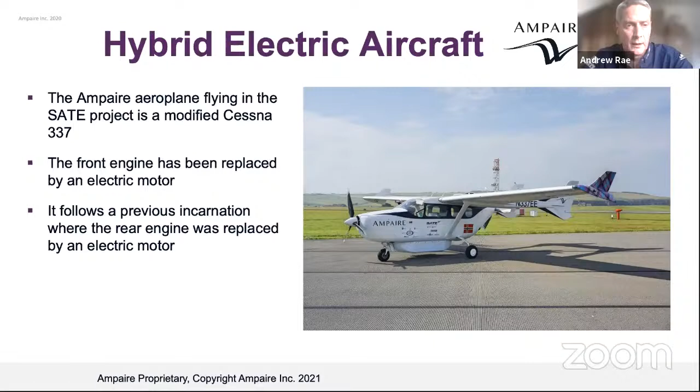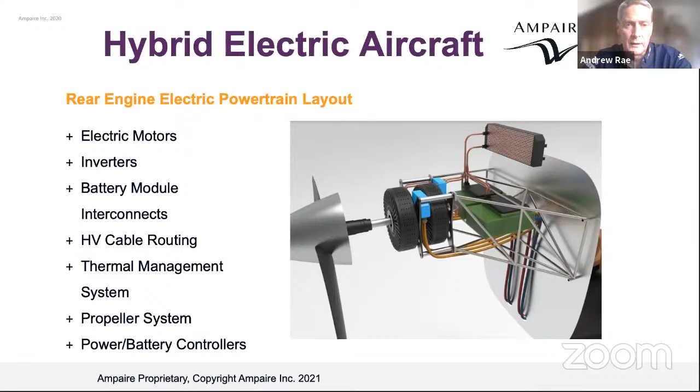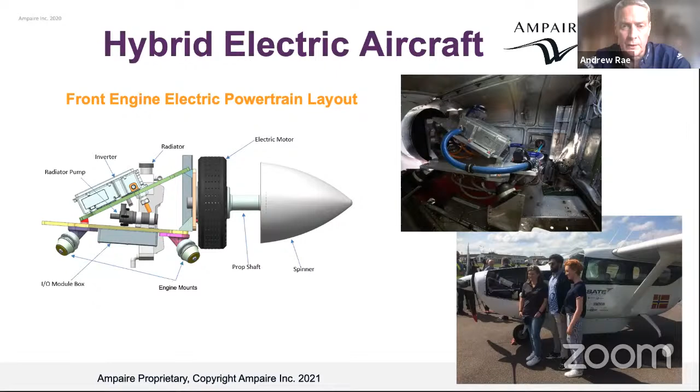The version that flew recently in Orkney had the front engine replaced with an electric motor. On the bottom right you can see some of my colleagues at Ampaire, and the picture above that is where the internal combustion engine used to be; now there's quite a large void showing where the silver box with the blue cable going into it is the inverter. The black donut at the front is the motor, and the rest is to do with cooling. Because this part of the aircraft is near the nose, and the motor weighs a lot less than the internal combustion engine, we've had to put ballast in to keep the weight and balance the same. The battery sits in a gondola underneath the fuselage. Next slide, please.

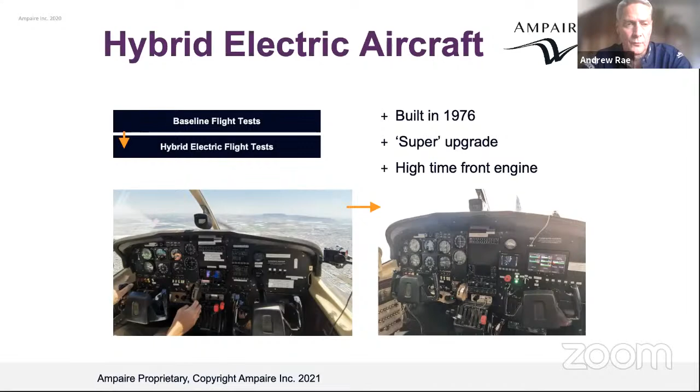The original aircraft was built in 1976, and we took the decision to replace the front engine. On the right-hand picture, just in front of the right-hand yoke, you can see what looks like an iPad with green lines on it - that's the new electric motor management system. It gives us things like the current state of the battery, the motor temperatures, and that sort of thing - the things the pilot needs to know about for the alternative power plant. Next slide, please.

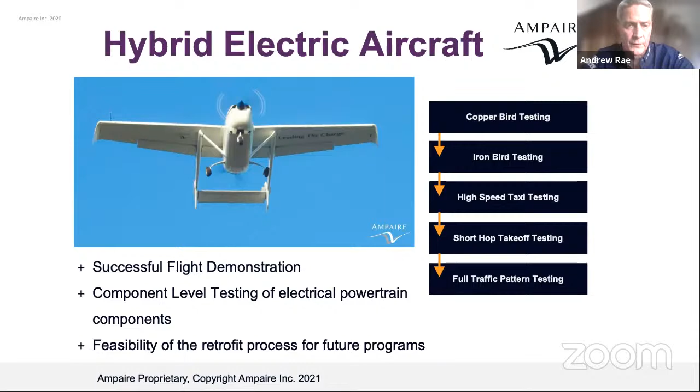So we went through a development process, and I'll describe each of the black boxes on the right-hand side in more detail in a minute. The original incarnation with the rear engine went through a successful flight demonstration, but that followed a series of component level testing and feasibility tests for the configuration we'd chosen. Before it flew, we did some taxi tests just to make sure the aircraft was functioning correctly.

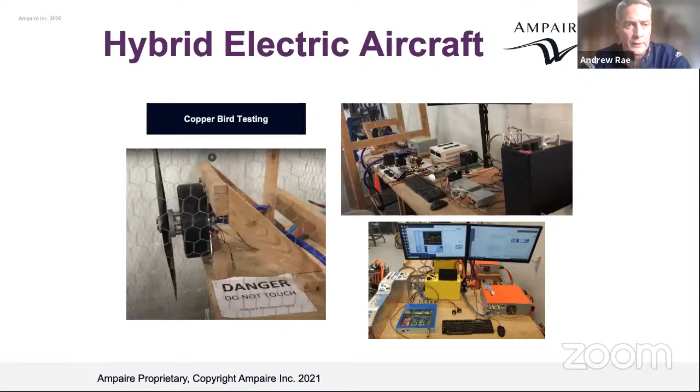So the first phase of that is what we call a copper bird. The copper being electrical wire, it's testing the electrical system off the aircraft. We have a caged motor and propeller there for safety on the left-hand side, and all of the electronics and control systems needed to control that motor were tested on a bench before it ever went anywhere near an aircraft. It's important also because there's quite a bit of software involved, so we can test the software fully without endangering any aircraft.

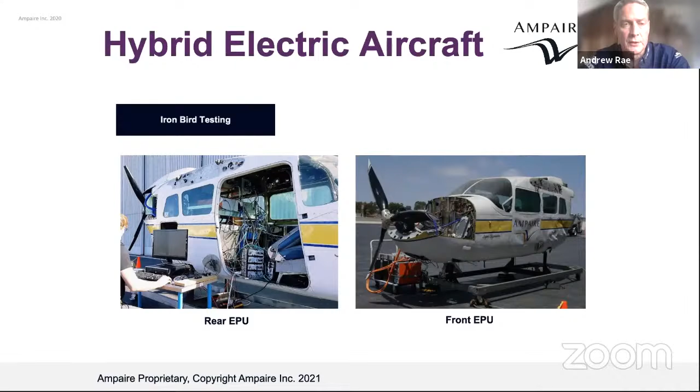Then we move from the copper bird to the iron bird, which was the same airframe, but an old expired airframe that we installed the system into to make sure everything integrated into the aircraft. We did that for both the replacement of the rear engine and the front engine. So it's checking the installation, checking that we can fit everything where we need to, that the wiring and cabling works, and that the software works in situ in a representative airframe.

As I said, we had to test all of the software, and that includes the motor control, which the pilot has the main input to, but also the battery management system. One of the problems with batteries is thermal effects, so we don't want thermal runaway - you've probably all seen what happens when lithium-ion batteries get too hot. But also, as part of the safety case for the aircraft, we can discharge the battery at a greater rate than normal, which gives us 5 minutes of full power on the front engine. So for example, if the rear engine failed, it gives us an opportunity to land the aircraft safely at a point of our choosing rather than just where the aircraft decides to fall.

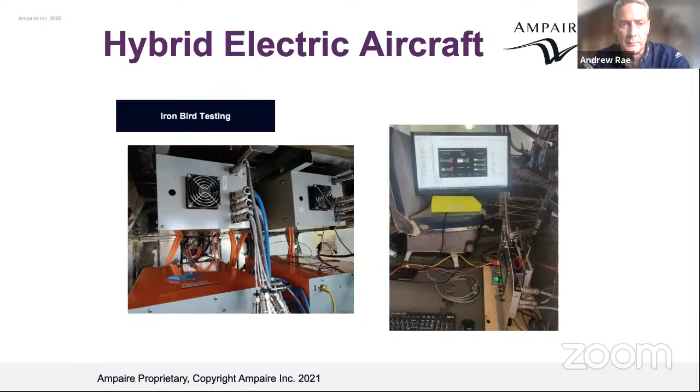A lot of the work is also what's called the human machine interface. So it's understanding what information the pilot needed to monitor the aircraft, as well as all of the scientific data logging that gives us an idea of the performance of the battery and the motor, not all of which is needed by the pilot. So it's refining which parameters the pilot needed to see, presenting those in a manner that was easily readable, so that we could then go to flight testing and the pilot had confidence that he was in control and had enough information to determine the state of the aircraft.

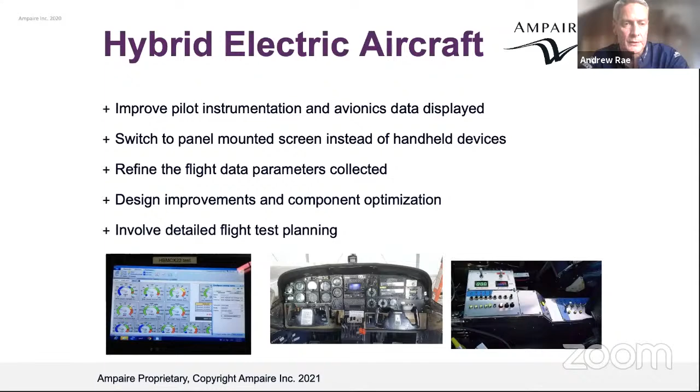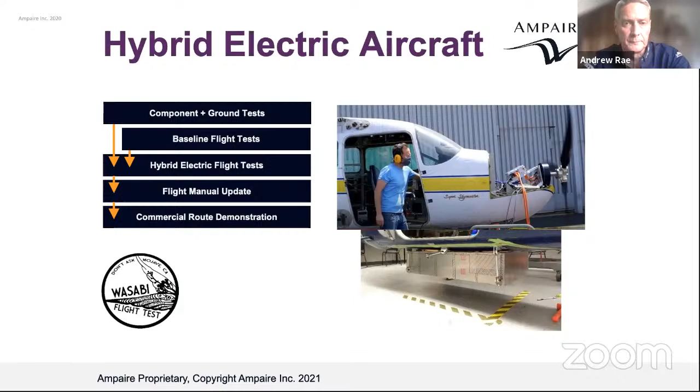So once we'd done all the Iron Bird work, we created the aircraft that did its first flights in California. It did 24 flights over a period of 28 days, accumulating just over 33 flight hours, and nothing went wrong with it - so we had 100% dispatch reliability. It has to be said that the electric motor is much simpler than an internal combustion engine, obviously, so the maintenance and reliability is much improved. At that point, we recorded the longest electric flight, which was 341 miles, lasting 2.5 hours. We broke that record recently, and I'll come to that later.

Having successfully flown in California, the aircraft was taken to Hawaii for flight testing on some airline routes there. We did over 20 flights over a period of 17 days and accumulated more than 20 hours, and again, nothing went wrong. This was the first trial of a hybrid electric aircraft on actual airline routes within Hawaii.

There's some interesting scenery in Hawaii, including part of a volcano. Flying over water in an electric aircraft is one of the safety cases we have to address, and obviously we had to do that when flying from Wick to Kirkwall as well.

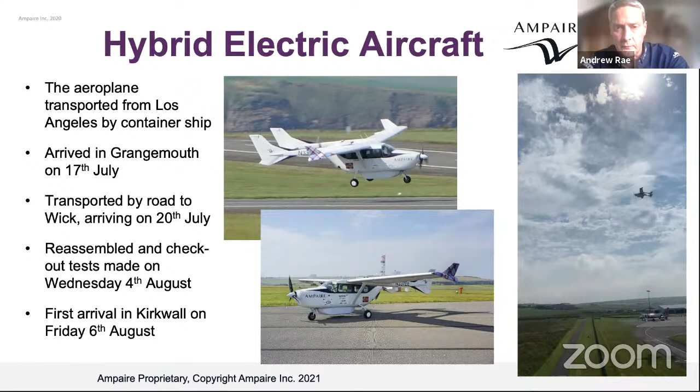Top left is the aircraft first arriving in Kirkwall, and there's a nice picture from the control tower at Kirkwall taken by one of the air traffic controllers of its first departure on that Friday.

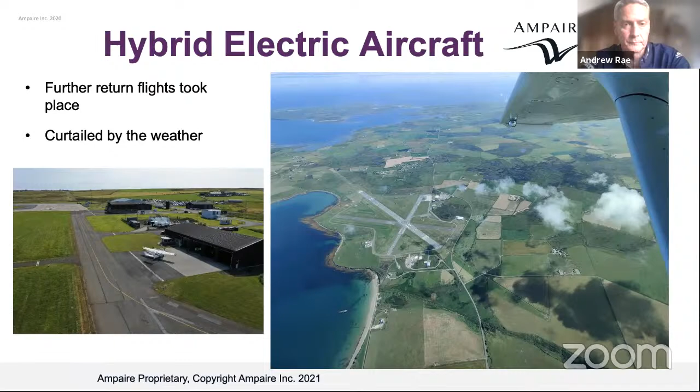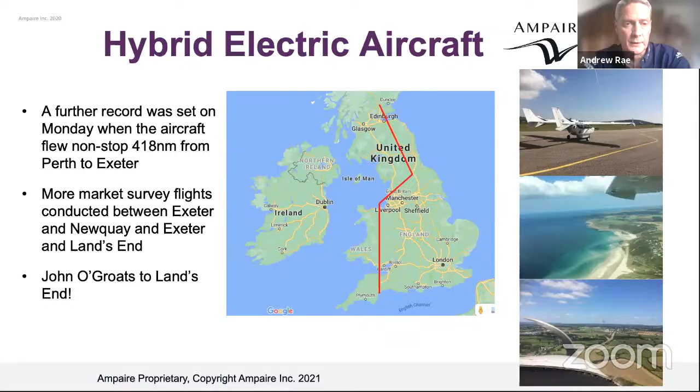Thank you, Andrew. Then also at Kirkwall Airport, a new project is underway to use an unmanned aircraft, or drones, for cargo delivery. This is led by German Moreno, who is head of flight operations at Windracers, an organization established to use drones for work for public benefit. German, the screen is yours.

Thank you very much, Noor, for the introduction, and thank you for the invitation to the event. My name is German Moreno, and I'm part of Windracers. We're an organization that wants to do freight transport using uncrewed aircraft systems. Today I'm going to be talking about the work that we're going to be doing in the Orkney Islands, starting the end of the month, September 2021.

So a little bit of background about Windracers and how everything started. The founders, in 2017, had this inspiration, and they looked at problems in places like South Sudan, where many people require food rations and humanitarian relief items. In South Sudan, it's estimated that 7.5 million people are in need of these items. Currently, deliveries are done either by road or by aircraft, but the civil war and floodings have decreased the amount of aid that can be transported via road, so many of these items need to be transported via aircraft. The founders of Windracers thought this could be done with unmanned aircraft systems.

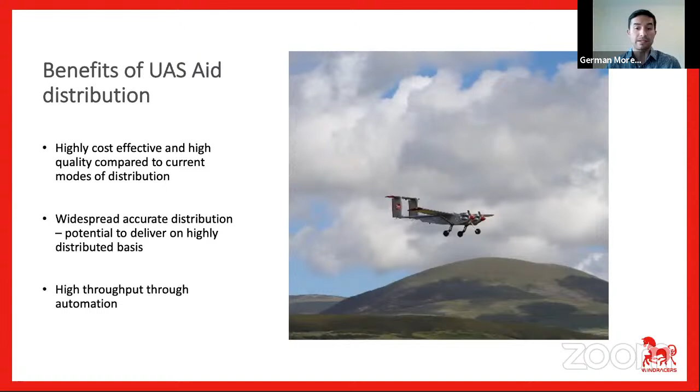So during the last decade, there has been a lot of talk about the benefits of using UAS over crewed aircraft systems due to the cost and things like that. But basically, we know that for this type of mission, the amount of automation that can be applied to these systems can be very beneficial and reduce the cost of these missions, for widespread distribution and the high throughput that can be gotten from automation.

So this is about the conceptual design. Basically, the initial requirements that the University of Southampton had for designing and developing this aircraft was 1,000 kilometers of range, carrying 100 kilograms payload, a lot of focus on the reliability of the aircraft and redundancy of the critical flight systems, that it's easy to maintain and has a small ground footprint. And most importantly, being able to operate in really rough areas and from short and unprepared runways, preparing this to operate in places like Africa.

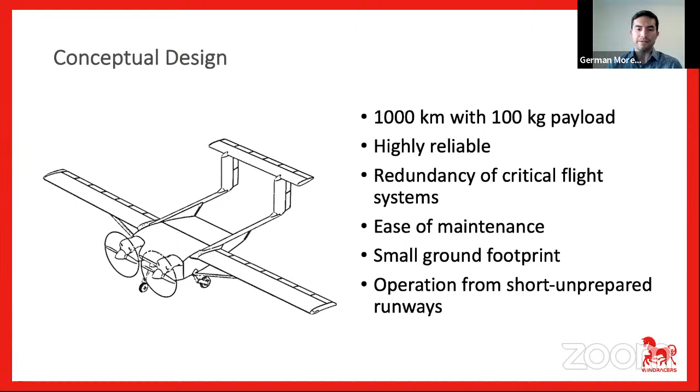So these are the specifications for Ultra TD2. It's TD2 because this is the second generation aircraft. The first generation aircraft, Ultra TD1, flew for the first time in summer 2019. And from then on, we have been doing a lot of improvements. This is a narrower body and improved performance aircraft.

So the aircraft you see there is Ultra TD2, has a wingspan of 9.7 meters. For reference, this is pretty much the size of a small manned aircraft like a Cessna 172 or a C-42. It has an empty weight of 285 kilos and a maximum takeoff weight of 400 kilograms, of which 100 kilograms can be payload. Current fuel capacity is 33 liters and it flies with about 9.5 liters per hour, so about 3 to 4 hours endurance is what we currently have.

And we're moving on to the next iteration, which will have between 6 and 7 hours endurance. The usable volume, which is probably sometimes more important than the payload mass, is 700 liters - to give you a reference, that's as big as the boot of a estate car. It cruises at about 75 knots, and its wind limitations are 40 knots total wind and 20 knot crosswind for takeoff and landing.

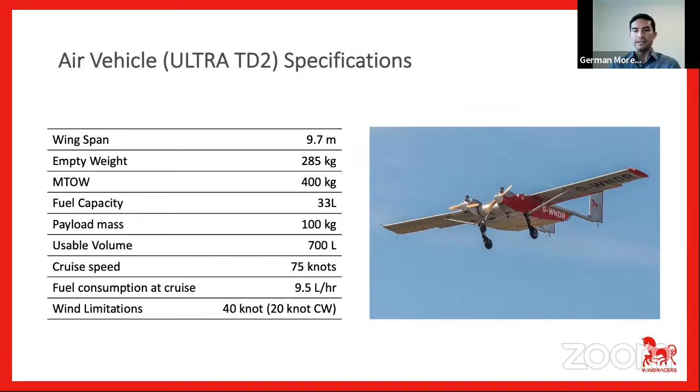So I talked about the reliability and the redundancy of the systems of Ultra UAS. When we came up with this design, we decided to basically discretize all the control surfaces so that we can have multiple redundancy of these flight critical systems. That means that if a section of an aileron fails or is broken, the flight can continue without affecting safety, because the other sections will take over. So we have multiple redundancy of all flight critical systems like engines and flight control units.

In the flight control unit, we use a distributed avionics masterless flight control system. This is very different from the philosophy of current flight controllers in both civilian and military uncrewed aircraft. Usually in systems with two autopilots, there's a system called the arbiter, which makes decisions on whether one autopilot has failed or not. In this case, what we have is 3 flight controllers with lots of sensors and actuator nodes available to them within a network. So there is no single point of failure, and even if 1 or 2 flight controllers fail, the aircraft can continue flying safely to its destination.

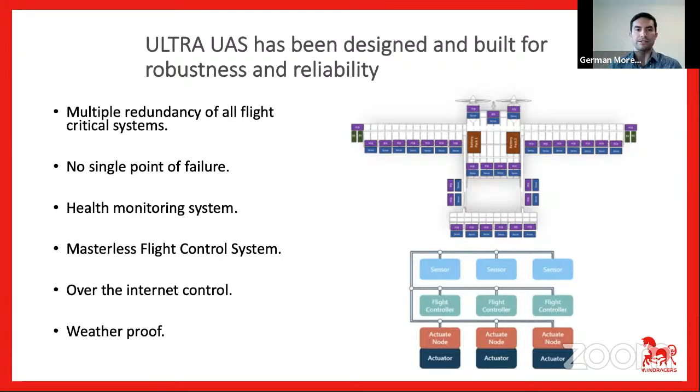Other features of the system: it's over the internet control, meaning the operator doesn't need to be co-located with the system - it can be controlled from anywhere in the world. It has an in-house designed health monitoring system that tells the operator on the ground everything about what's happening with the engines, electric system, and fuel system, and basically the overall health of the whole aircraft. And the aircraft is pretty much weatherproof - all the electronics are enclosed in IP-rated boxes, so it can fly in rain, and as I said before, in high winds up to 40 knots.

Okay, so a little bit of the work to date. As I told you, TD1, the first generation of the aircraft, flew in 2019. And then at the beginning of 2021, we started flying TD2. However, we've been doing several operations, and here I'm just showing a few of those. During the first lockdown, because of COVID-19, we did the first point-to-point beyond visual line of sight operation done by a civilian UAV here in the UK.

This was a relatively short flight between Lee-on-Solent and Binstead in the Isle of Wight, about 12 kilometers long, but it was a big milestone for this type of operations. In the top left picture, there's a person loading the aircraft with containers carrying NHS equipment and samples. In the bottom right, you see the route between both points. We were carrying on average 40 kilograms, 700 liters of volume. This was a world first that was documented everywhere, with lots of videos and footage available online.

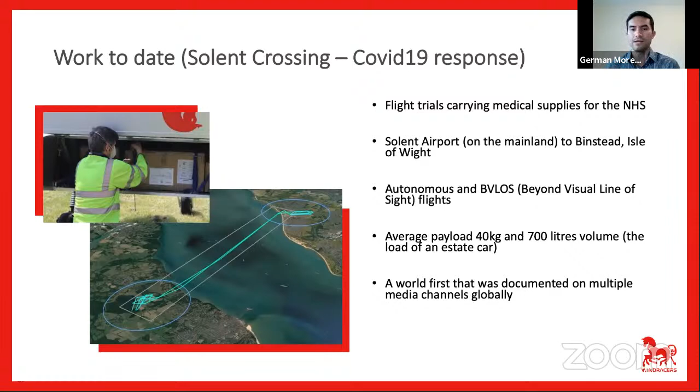Later that year, in December, we did the first flight to Isles of Scilly, from Land's End to Isles of Scilly, also carrying NHS support. It was an average load of 50 kilograms, about a 27 nautical mile route between those two points, roughly 50 kilometers, done in less than an hour return flight. It was a little constrained because of air traffic in the area, so we had a really short time frame for this flight, but it was completed in December last year.

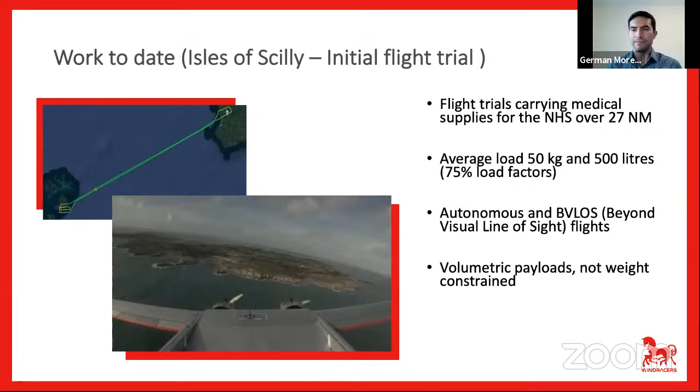Now I want to tell you about what we want to do in Orkney. This is within the framework of the project SATE. We will be doing operations between the Orkneys, the Shetlands, and mainland Scotland, but mainly based at Kirkwall Airport.

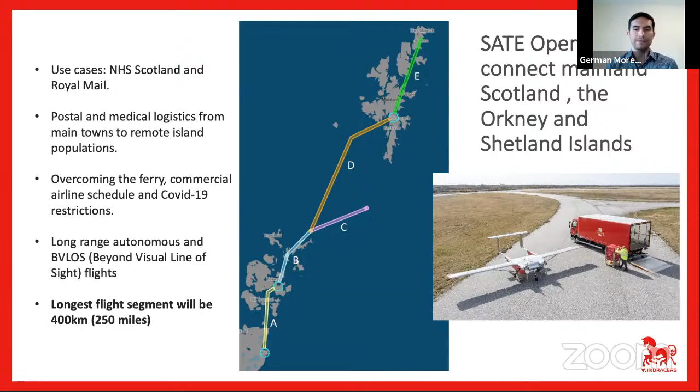This couldn't have happened without all the help from air traffic controllers and air traffic service units. The way we're going to do this is using segregated airspace - temporary danger areas or temporary corridors where only the UAVs will be flying between those two points. This is because we currently don't have a certified detect and avoid system, so the segregated airspace enables us to fly point to point without incursion from other traffic. To set up these pieces of airspace, we've done lots of engagement with local and national stakeholders, and organized a schedule of flights that doesn't overlap with other flights from Loganair and other companies flying in the area.

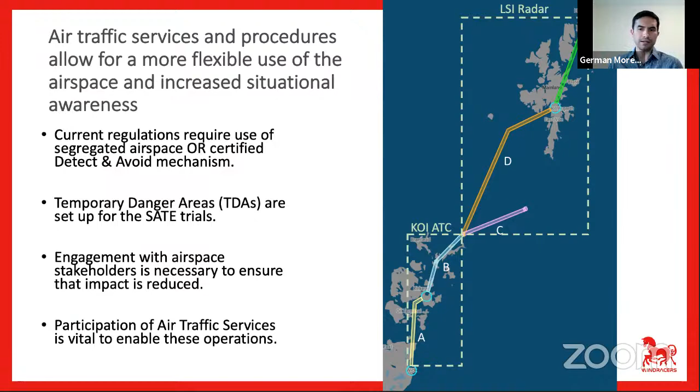So basically, what we will see during the SATE operations of Windracers, the initial phase starts 27th September and runs up to the 24th of October. We will be doing routes between Kirkwall and Wick, Kirkwall and Ronaldsay, and Kirkwall and Fair Isle.

And then the second phase of the project, starting March next year, will cover between Kirkwall to Lerwick and then to Unst. Flights can be followed using Flight Radar 24. The aircraft is equipped with electronic conspicuity, so usually it shows up in Flight Radar 24.

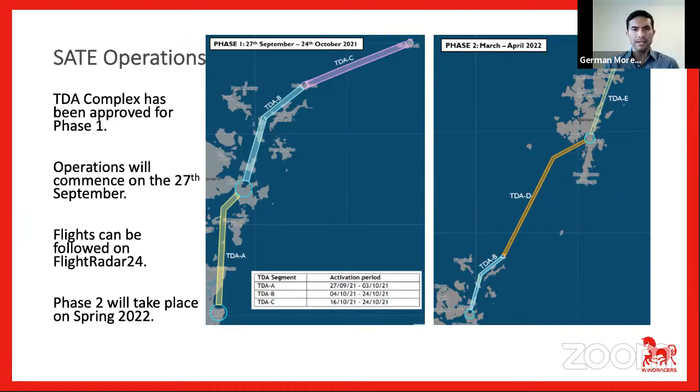So first, in the automation, we will be able to accommodate to environment and system status. So right now we have this human controller that is looking at all the health of the systems and making decisions and navigating and changing parameters of the system at all times. So we will reduce that human intervention by using data from the health monitoring system to make decisions and to accommodate to the environment. That way, the operator doesn't need to have so much input during the flight.

We're also working on communication systems. So in November, we will release beyond radio line of sight command and control system. So we'll be using multiple channels of communication, serial line of sight radios, 4G and satellite communications.

We are also working on performance to increase the payload and range. The next generation of the aircraft will have wet wings, so we'll have probably 3 times the fuel capacity that we currently have. And we have a team that is working on alternative modes of propulsion, so checking how we can convert these aircraft either on an electric or hydrogen powered system. And we're also looking at a heavy fuel engine, mainly for maritime operations, but concentrated on alternative and sustainable modes of propulsion.

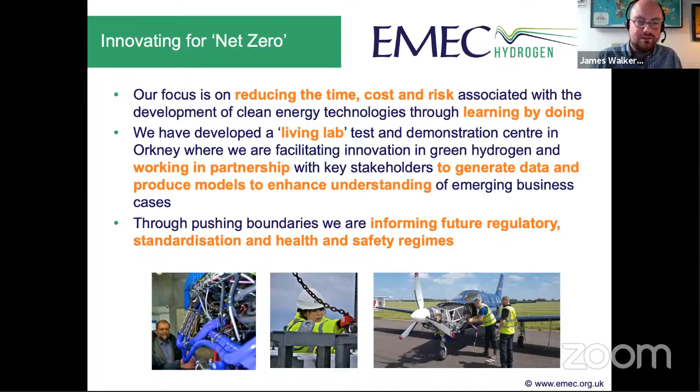And hydrogen is considered to be one way of possibly storing some of that power. So the premise is you have excess renewable electricity, you use that to make hydrogen, and then you have that store of fuel or energy that you can use at a different time. And hydrogen is also particularly interesting because it can be used in a lot of different applications.

So heavy duty transport is an obvious one because it's just quite difficult to replace fossil fuels, petrol, diesels, etc., with other alternatives. Batteries and electrification will play a huge role in that for most transport applications. But thinking about big vessels, for example, in a maritime context or long distance aviation, where you need to think about how you'll possibly store the right amount of fuel, there's potential role for hydrogen essentially. So that's an area of focus for us. The other two aspects we won't touch on tonight, so I'll leave that for now. And on that note, next slide, please.

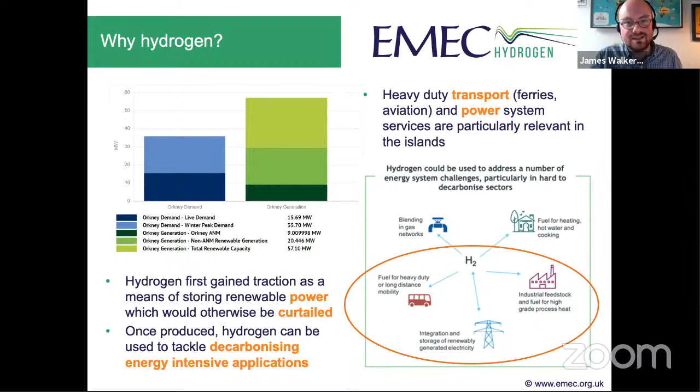We then store the hydrogen that we produce. We load it into tanks on board what are called tube trailers, specially designed for the roads on Eday, which Jerry will talk about shortly. And we load those in the back of the trucks, which then go on to ferries to bring them back over to Orkney mainland, where the hydrogen can be used for a whole host of things, which I'm going to talk about in more detail. So next slide, please.

And just to further that introduction to some extent, I like to talk about what I am starting to see as the Orkney hydrogen economy.

So as we develop more and more projects and as other organisations become more and more interested in the role for hydrogen in the Orkney energy system, we are seeing the development of what could hopefully in the future be realistically described as the hydrogen economy, whereby hydrogen produced in Orkney can be used to meet energy demand in Orkney. So you have this future history, as it may be, where fuel that's produced in Orkney can actually address the needs of transport demand in Orkney without having to import fuels. And I think that would be really transformative in terms of community resilience.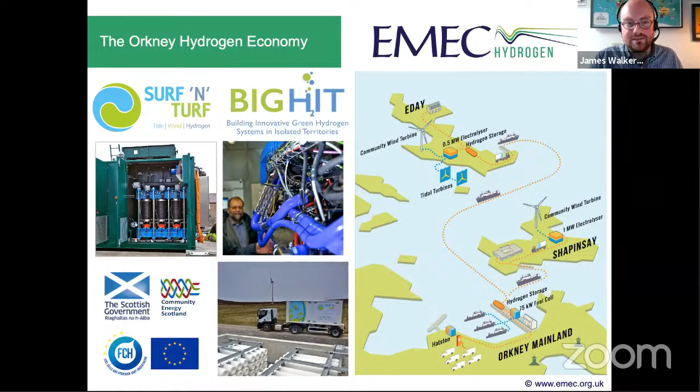So that's all I wanted to say on this one, other than just to highlight the two projects there that we're heavily involved in, led by other organisations though, so worth referencing the key role that many of the partners that we work with locally play in the work that we do. Next slide, please. Thank you. And next again one.

So I'm just going to talk through some of the projects that we're involved in in a maritime and also an aviation context. So we won't spend much time on the aviation aspects. That's been well covered in terms of the two talks we've heard already, but we're also involved in this area. So as I mentioned, it's potentially a good use of hydrogen, potentially an important role for hydrogen in the future. And that's gotten us involved in a couple of projects looking at different applications there.

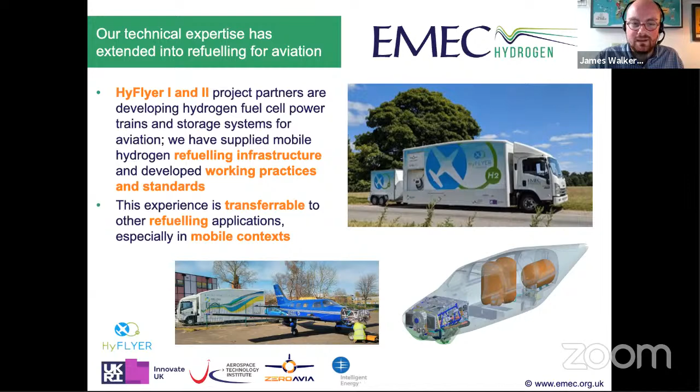So the HyFlyer 1 and 2 projects are ones that have seen the conversion or the retrofit of existing aircraft over to hydrogen fuel cell propulsion. And our role in those projects is looking at refueling. So what you see here is a truck that EMEC commissioned and that we own and operate, which has an electrolyzer on the back to produce hydrogen, storage on board, and also a dispense capacity so that we can actually directly refuel an aircraft on airside. And that's quite an innovative bit of technology and really exciting bit of infrastructure for us to own and operate. And hopefully will be transferable in the future.

Next slide, please. And then I'll just very briefly touch on this one. So this is the SATE project that we mentioned a few times already. So this is run by Highlands and Islands Airports Limited, who own and operate Kirkwall Airport. And what they're looking to do is develop a sustainable aviation test environment. So looking at Kirkwall as a place that will be really ideal to test all sorts of aircraft. We've already heard about 2 of those so far.

There are hydrogen elements there, so Loganair in particular are keenly interested in the role that hydrogen could play in their fleet. So we're playing a role there to support in using some of the refueling expertise that we have from prior activity to think about what it would look like to provide hydrogen to aircraft at Kirkwall Airport. So a lot of forward-looking thinking there. And next slide, please. Thank you.

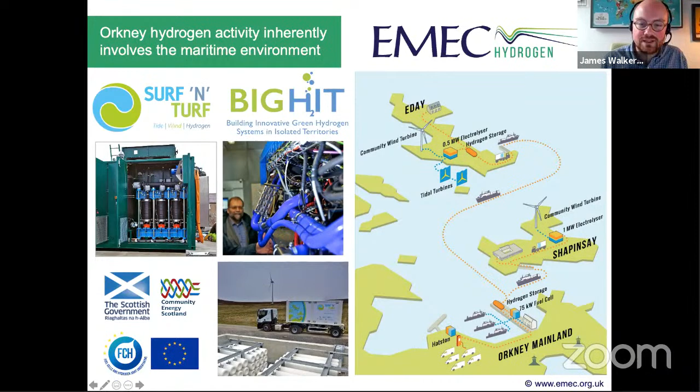So I use this picture a lot because I find it helps set the context up quite well. So I'm going to hand over to Jerry here, who's going to give us a run through of the maritime activity that we've been involved in and maritime ambitions that we have. But really, I just thought it was worth pointing out. I know this will not be news to anyone sitting in Orkney, but it's hard to discuss the energy system in Orkney without talking about maritime. So ferries are so essential to getting between the islands that really it's time for us to start thinking about how we make those cleaner and what the alternatives are. So over to you, Jerry.

Thank you very much, James, and thanks everybody for having me here to speak. So the HyDIME project has been a really interesting learning process for everybody who's involved.

What we're doing is retrofitting one of the auxiliary engines, which traditionally uses diesel all the time, with a hydrogen injection system. So we will be injecting hydrogen into the engine while it's going through its usual cycle. So that involves changing a manifold on the top to put a gas injector next door to the traditional fuel injector. And by doing that, we'll reduce the amount of carbon fuels and so emissions as well.

It says here on the slide that the project has faced these regulatory barriers, which is one of the biggest stops that we've had in the project, if you like, because we have to go through a lot of processes and procedures and studies for people like Lloyd's Register and the MCA, who will ultimately give us the certification to be able to test this system out properly, and that's been, you know, quite a struggle to get through.

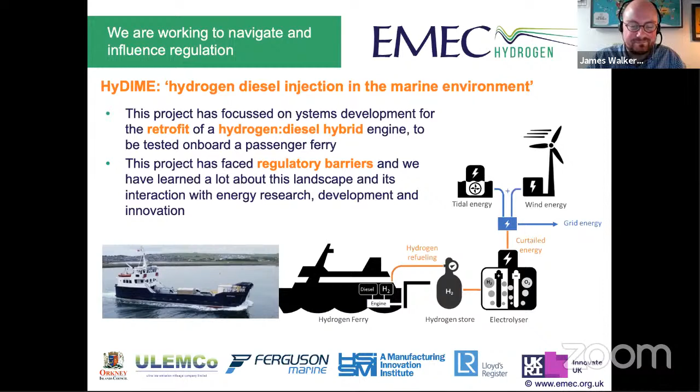Thank you. So there's a couple of key aspects that we've learned through projects like HyDIME and some of the others that I've mentioned, and I'm just going to touch on these in detail. The key focus point for these is looking at safety. Hydrogen is often regarded as potentially being more dangerous than other fuels, but the reality is that provided you know how to handle hydrogen and provided you put the right systems and practices in place, that's not the case. It's all about just learning a different way of working, essentially, and that's what we're going to touch on here.

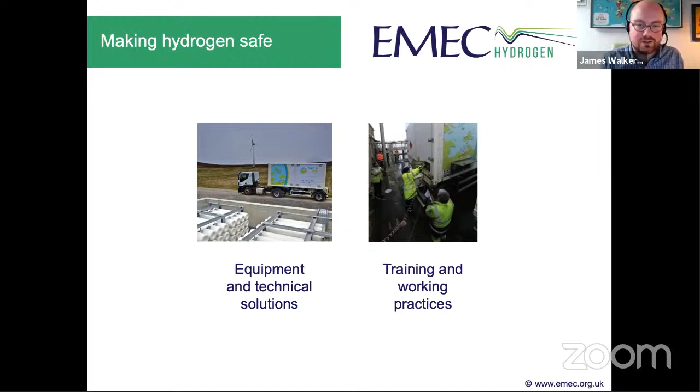Next slide, please. Key one of these is technology. So looking at bits of equipment that are specially designed for using hydrogen, or ways of designing systems so that they operate together effectively to manage the use of hydrogen.

So Jerry's the expert on this, so I'm going to stumble through this a little bit till she comes back. The key one here that I think is worth mentioning, Jerry, go on. Hi, I'm really sorry, this has been a very strange evening so far. So anyway,

The picture that you can see there is a multi-element gas container. We use this to transport the hydrogen from the island of Eday, where we're making it, to the mainland, and it's been specially designed to be light for the road. We've got carbon wrapped aluminium cylinders on the inside, which are all piped together, and they're also, especially for the ferry travel, fitted with a sprinkler system for safety, and it's all specially designed to be transported on the ferries.

So it'll drive onto the boat, it'll get connected up to the boat's own fire system, so that if there was an emergency on board or a fire on board, you could keep the cylinders cool and safe.

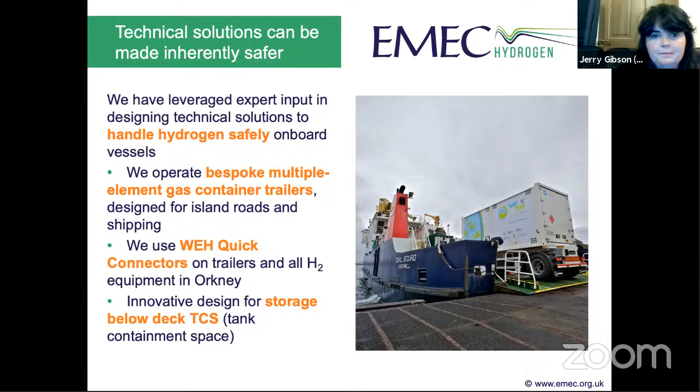Next slide, please. So we touched on the training, and in Orkney, along with the Stromness Nav School and Orkney Ferries, we developed this hydrogen safety training for mariners, which is a tag on to the IGF code.

The IGF training is training that mariners get when they're working with LPG or LNG gas. We had to develop this safety training for hydrogen because LNG and LPG are a completely different type of gas that behaves very differently. So we basically have to unteach some of the learnings that they learned at the IGF code for hydrogen.

And it's the first time, as far as we know, the first in the world offering of this type of training, and it's been approved by the MCA. It's all local people to Orkney that are providing the training. You can see in the pictures we've got some of the crew off the Shapinsay ferry here, along with one of the drivers from Northwards, who's very good now and been through the training a few times. So it's very good to have him there helping as well.

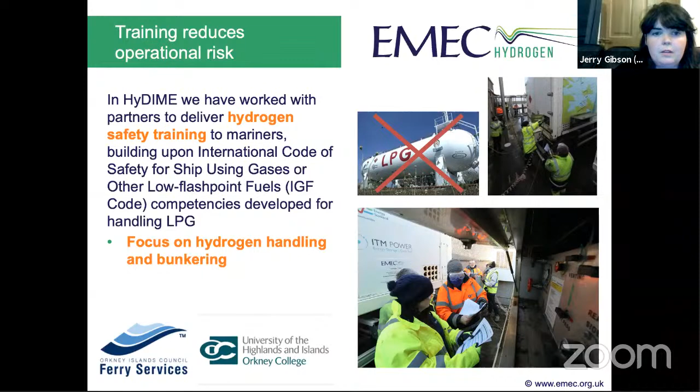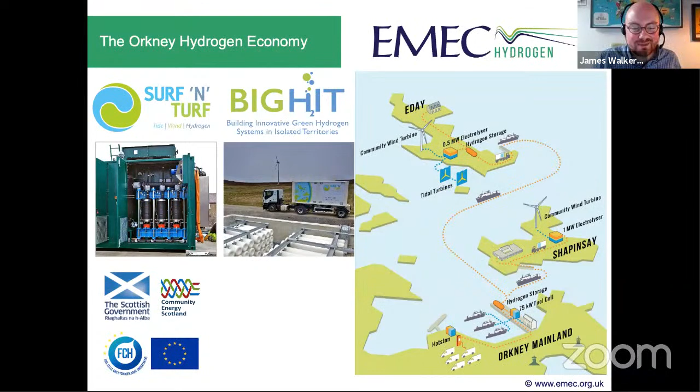In the interest of time, to be very brief: hopefully we've shown the role that hydrogen can play in some of the different transport elements, looking at the Orkney energy system and the future Orkney hydrogen economy. Building on the point about the vessels you see in the picture, showing an inherently maritime orientated environment, we've also got the aircraft. So there's plenty of opportunity in the future for hydrogen fueled aviation in Orkney. I know there's ambition to consider the inter-island routes, and we would very much welcome that and look forward to working with partners to see what that looks like in the future. So that's us, thank you very much.